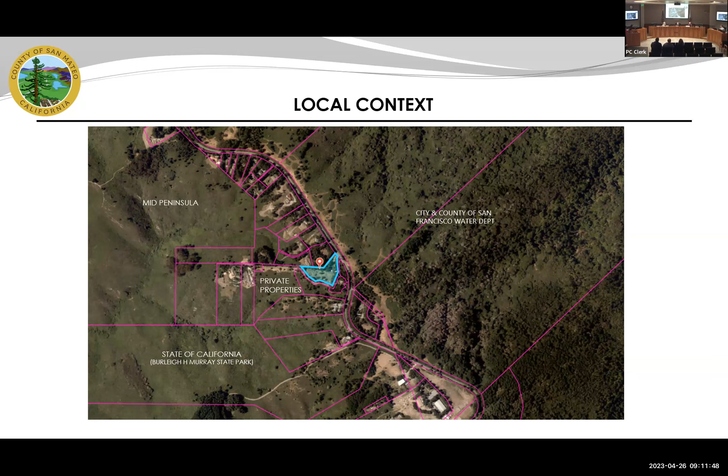The project is surrounded by a Midpeninsula parcel to the upper left corner and State of California Park on the bottom left, and San Francisco Water Department lands on the right-hand side of the parcel, with private properties adjacent to the subject parcel.

The house is accessed from a private road called Misty Ridge Road, which wraps around the existing house, and it is covered by a lot of trees in the front, as shown in that picture. The existing house has a 3-car attached garage, which will be retained and used as primary parking for the proposed new house. This slide shows the location of the existing house with respect to the proposed house and some views of the site.

The project also qualifies for an architectural exemption, as confirmed by staff through a site visit, as the proposed new house will not be visible from Skyline Boulevard.

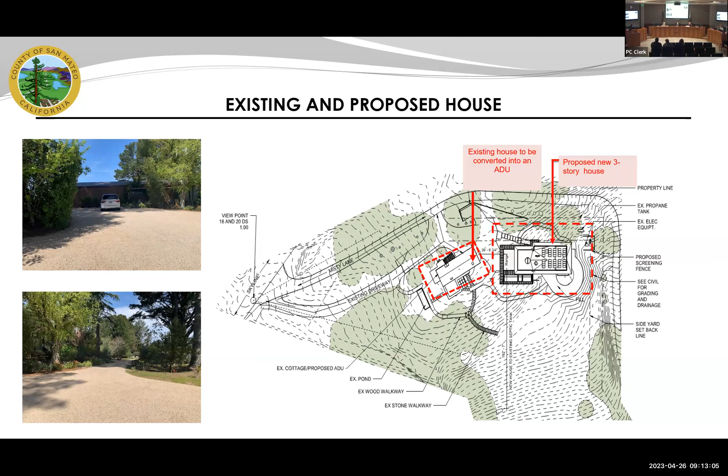Here's another slide of the existing and proposed house, which shows the existing gravel driveway, which will be maintained and widened for required fire truck turnaround access. The existing attached 3-car garage will be maintained and utilized for the proposed new house. Here's a rendering which shows the context of the proposed house with the current situation.

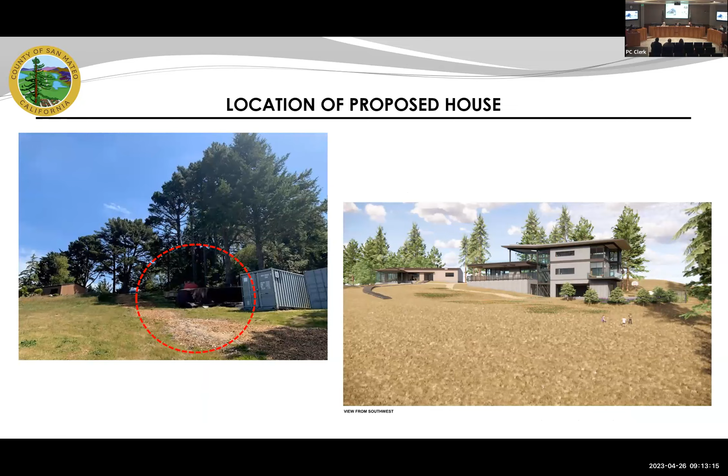So 2 Monterey pine trees, tree number 34 and 36, were removed under the hazardous tree exemption. These trees did not require a permit from the planning department, as they were exempt from permit requirements. None of the other significant trees are being removed for constructing this house.

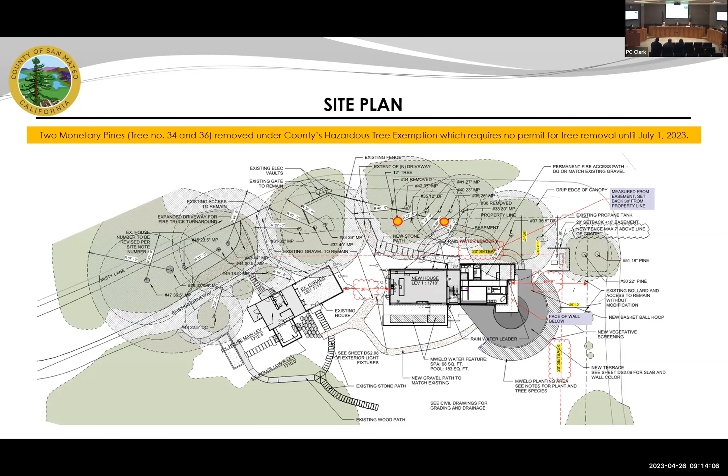Staff has also worked with the applicant to reduce the grading quantities. There was a second driveway being proposed from Misty Ridge Road, from the right-hand side, but that was eliminated and the existing driveway is being used. The picture showing a round corner is actually the proposed playground area for the house.

As mentioned before, the existing driveway, shown as the dotted line, will be widened up to 20 feet to meet the required fire truck turn radius. The project was conditionally approved by County Fire. The second driveway, shown as an arrow on the right-hand corner, was eliminated. The circular portion is just the play area, which will have a basketball hoop and other play equipment. The dotted lines show the limit of grading.

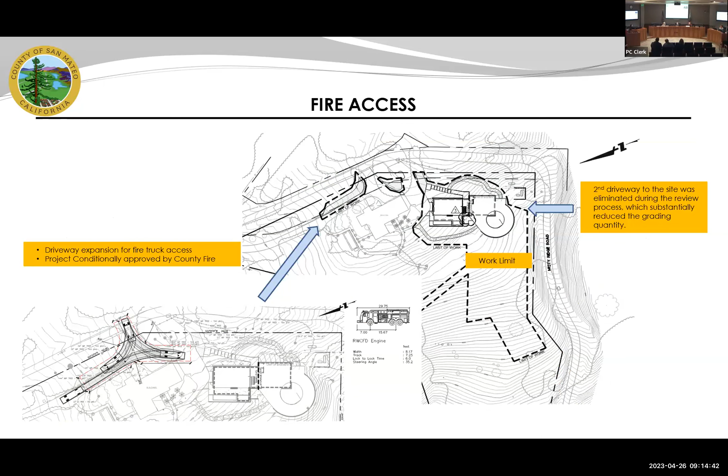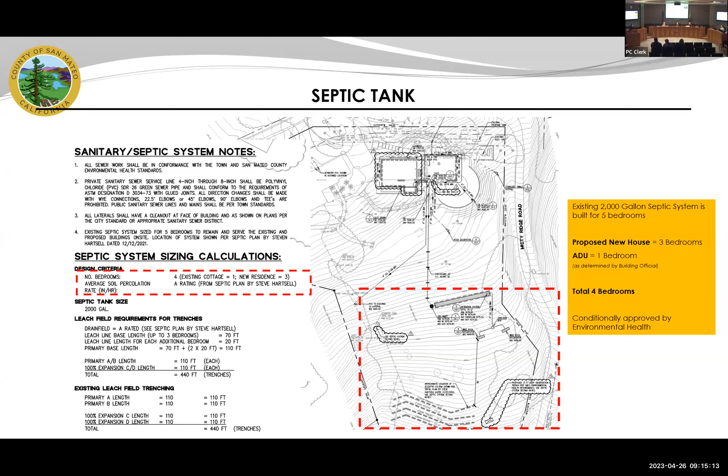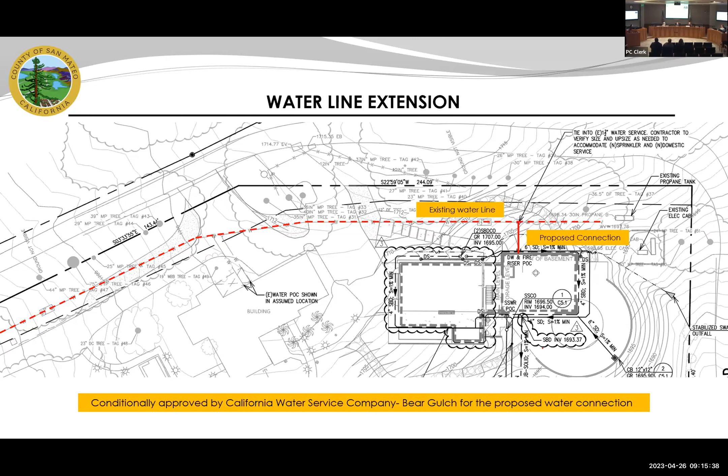This slide shows the water line connection that runs along Misty Ridge Road. The proposed house will tap into this existing water line connection. The site is served by California Water Service Company, Bear Gulch, and the applicant will be required to obtain all necessary permits from the water service company before the issuance of the building permit.

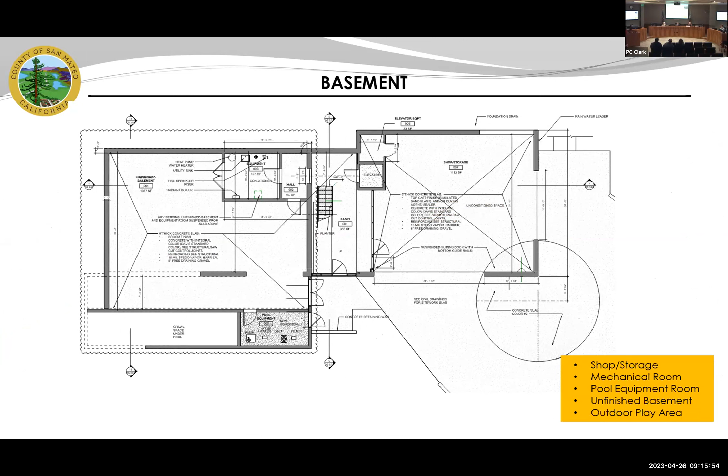This is the floor plan of the basement, which basically shows an unfinished basement, a mechanical unit, a storage room, and an outdoor play area.

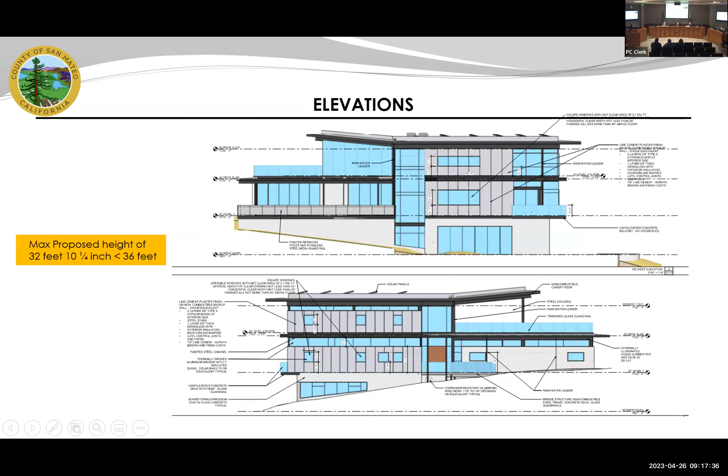Here are more elevations of the house. I'd like to highlight that the upper elevation is the one that will be visible from the Pacific Ocean, and the bottom one is the one that will face towards Skyline Boulevard or Misty Ridge Road. These are the side elevations as seen from Misty Ridge Road and from the existing house.

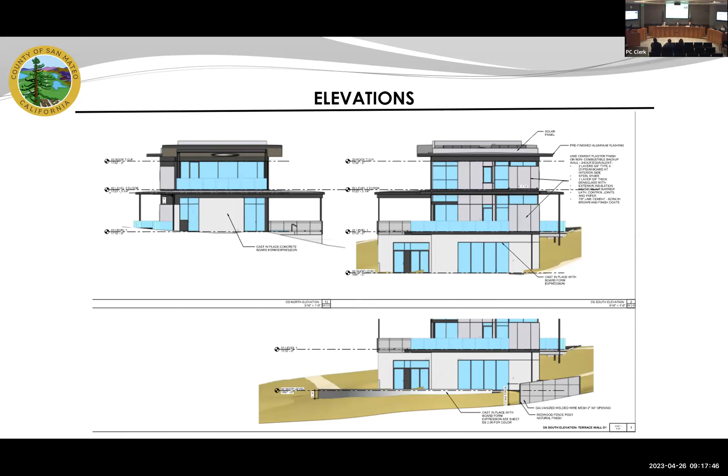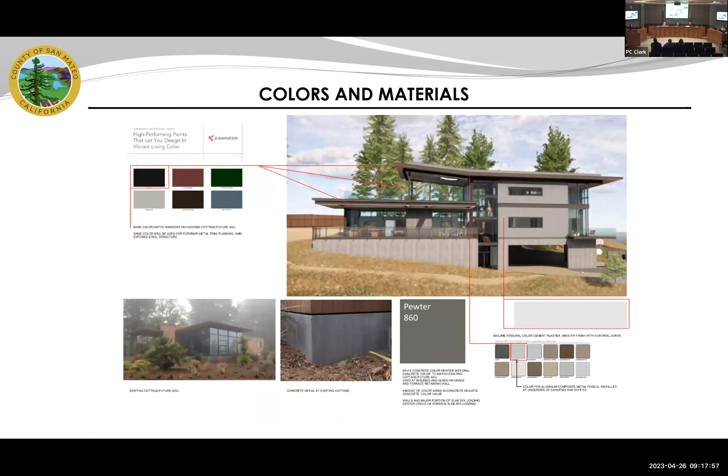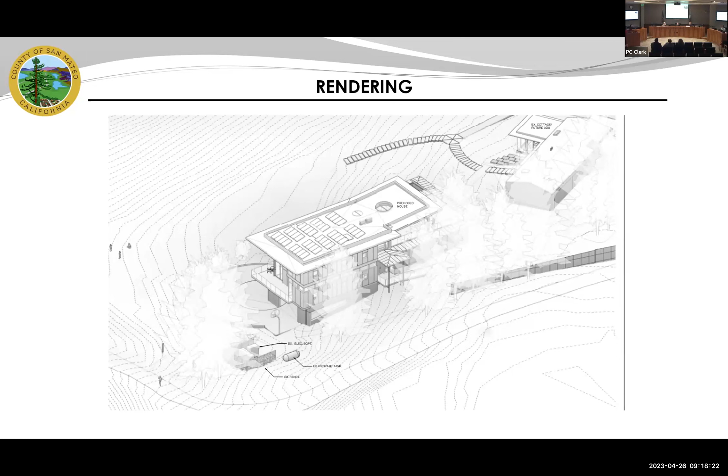This is the view from Skyline Boulevard, but it will be shielded by the existing trees on the side.

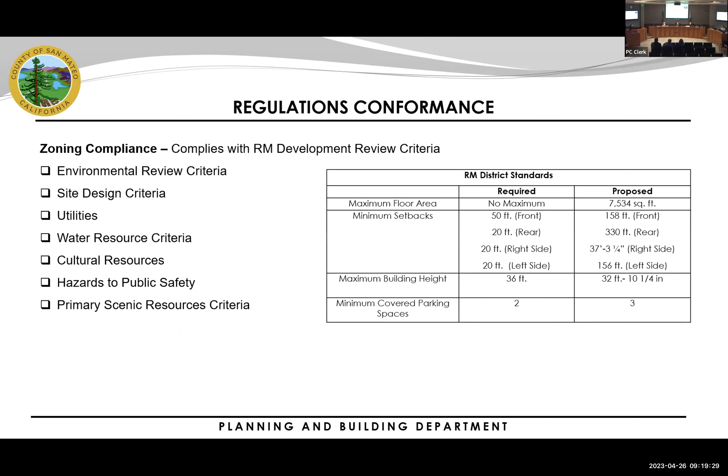The grading of the permit would not have a substantial adverse effect on the environment. The project conforms with the criteria of Chapter 8, Division 7 of the San Mateo County Ordinance Code, including the standards referenced in sections 9296. The project is consistent with the general plan.

An initial study and mitigated negative declaration was prepared for the project, and the comment period was from March 1st to March 23rd. No comments were received. Mitigation measures have been included as conditions of approval in attachment A. A total of 9 mitigation measures were included in the staff report to mitigate any potential impacts to aesthetics, cultural resources, geology and soil, and tribal cultural resources. Other best practice mitigation measures were included for air quality, biological resource, and climate change.

Staff recommends that the Planning Commission adopt the mitigated negative declaration and approve the resource management and grading permit for county file number PLN 2022-00109 by making the required findings and adopting the conditions of approval in attachment A of the staff report.

And I would also like to highlight that we received a comment late yesterday from Green Foothills regarding the use of the glass and its potential impact to birds. And there are a few ways which can be looked into to reduce any potential impacts, like glazing the glass or providing a screening. And the applicant is here to answer any follow-up questions you may have for that. That concludes my presentation, and I will be happy to take any further questions.

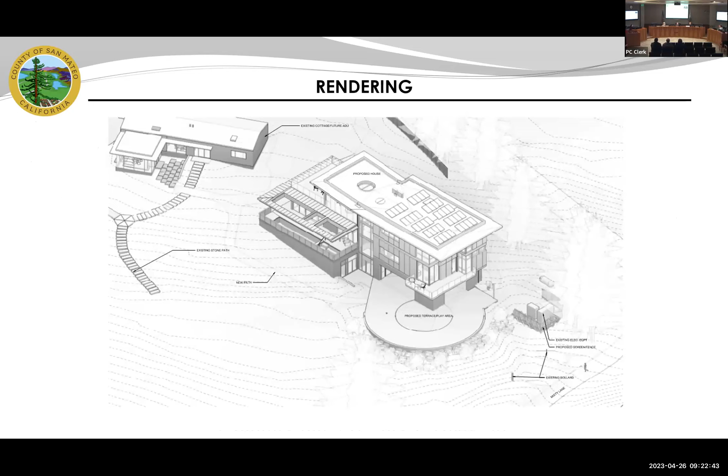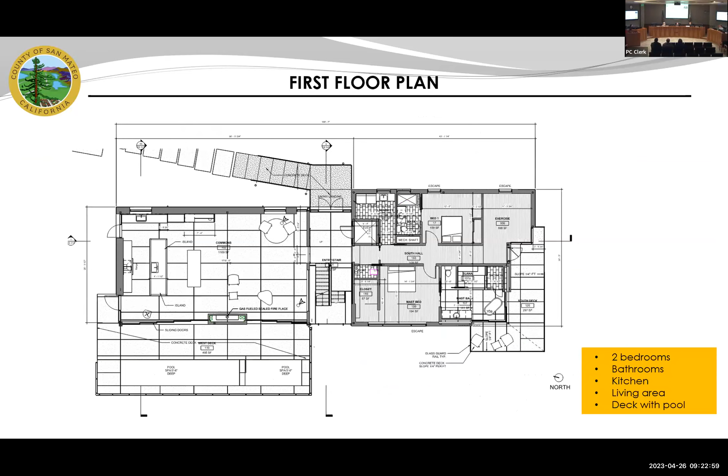So this open space next to the common living area on the bottom left-hand corner, which shows these two rectangular spaces, is actually pool. Oh, I see. Okay. And then it is going to be partially covered on the second floor, but still open to sky. And then the pool equipment will be located in the basement. So this is kind of attached to the house? Yes, it is attached to the house. Okay, all right. Let me see if I have anything else.

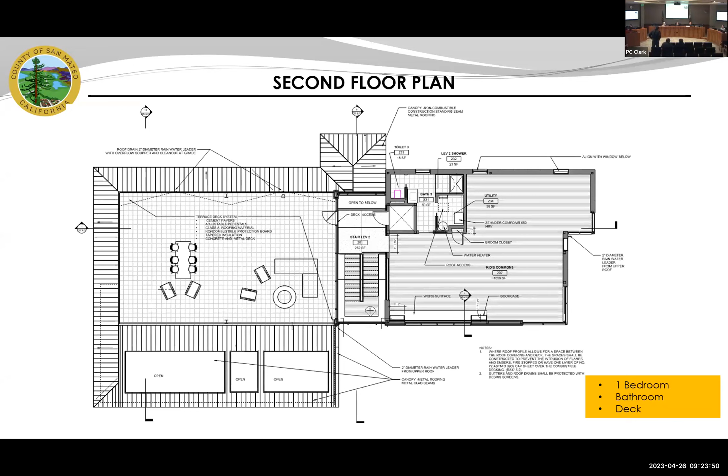Okay. Thank you. Yeah, I had something. I would like to know more about the glass too. So thank you, Sona. So if we have the applicant here, would applicant like to speak? You have 15 minutes. Please state your name and come to the podium.

Hi, everyone. My name is Omi Zahedi. This is my wife, Susan Perovi. And I'm James Gwise, the architect for the project. Okay, so a little bit about this project. We purchased this property about 3 years ago. We really fell in love with the area due to the views and the nature that it extends to us. This home that exists right now is very small. One of our little ones is somewhere in the back doing some homework, but we have 3 active boys. And so we need more space.

And so the idea behind purchasing this property was to complete the original plans of building a second home on here. James was the architect of the original home, and we've hired him to continue that vision forward with us being the new owners. The house itself lends itself to things that we have really looked at carefully over the last 2 years that we've been developing this to come and be here in front of you now.

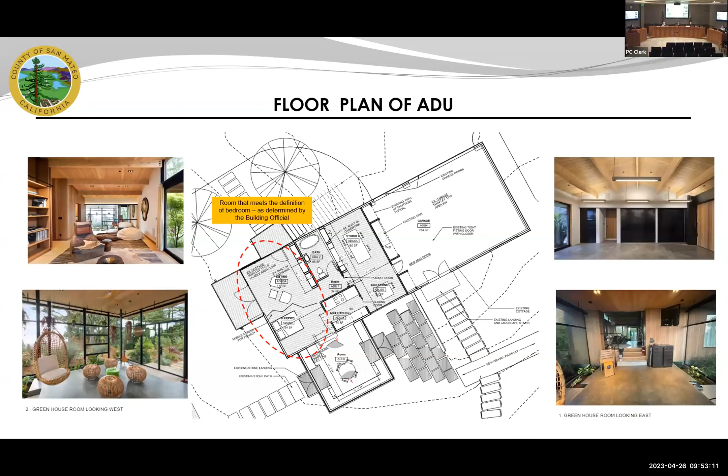Good morning, commissioners. The project before you today is a request from the San Mateo County Parks Department for a coastal development permit to implement a wildfire fuel reduction program. A component of that program includes the construction of a new fire access road in the south corner of Quarry Park. Additionally, the applicant is requesting approval to construct a bathroom facility in the meadow area of the park adjacent to the recently constructed pump track.

Start by familiarizing everybody with where we're at. Quarry Park property is located in the northeast side of El Granada on the rural side of the urban-rural boundary. It's composed of the original rock quarry area as well as the Wicklow addition and the Mirada Surf east and west portions.

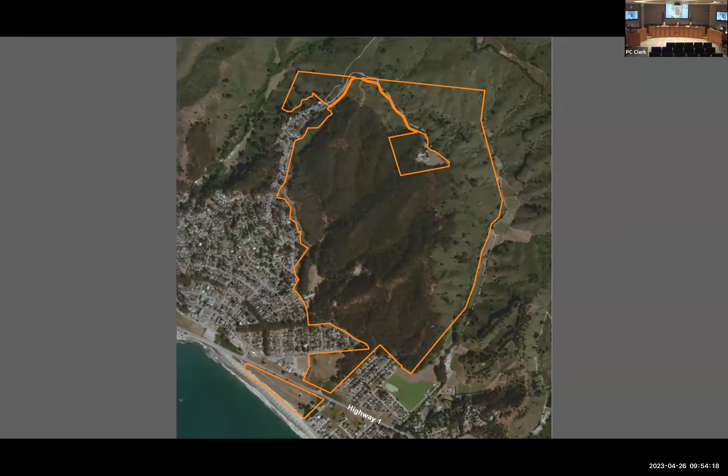Parks Department currently conducts limited fuel reduction activities within Quarry Park through the implementation of the county's routine maintenance program, which was approved by the Planning Commission in 2020. Typical fuel management activities covered by the RMP include creating or maintaining 100-foot wide shaded fuel breaks along the park's boundaries and along the park's fire roads and trails. Shaded fuel breaks are created through selective tree thinning and removal of undergrowth within the buffer zone.

With this requested CDP, the Parks Department is proposing to expand their fuel reduction activities into areas of the park beyond the currently managed service road corridors. Fuel removal along the park's boundaries closest to the residential neighborhoods is the first priority.

In this map here, the area identified as project number 5, which is highlighted in purple there, Parks proposes to establish a 200-foot wide non-shaded fuel break, similar to that which was created in the early 2000s along the park's boundary with Upper El Granada Boulevard. Within this non-shaded fuel break, all vegetation is removed during initial implementation and is then allowed to naturally regenerate.

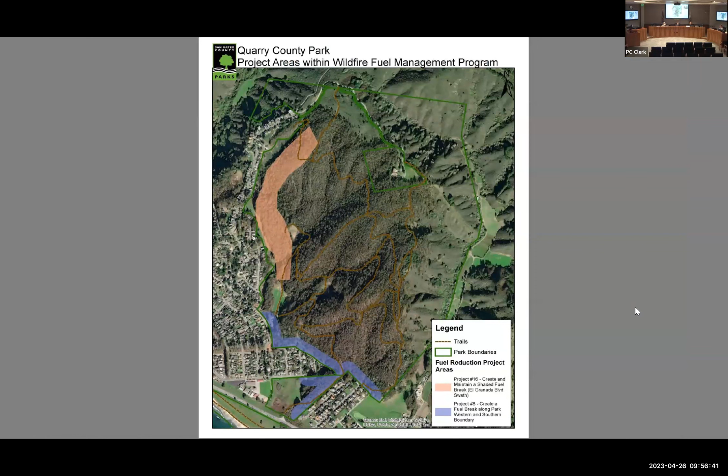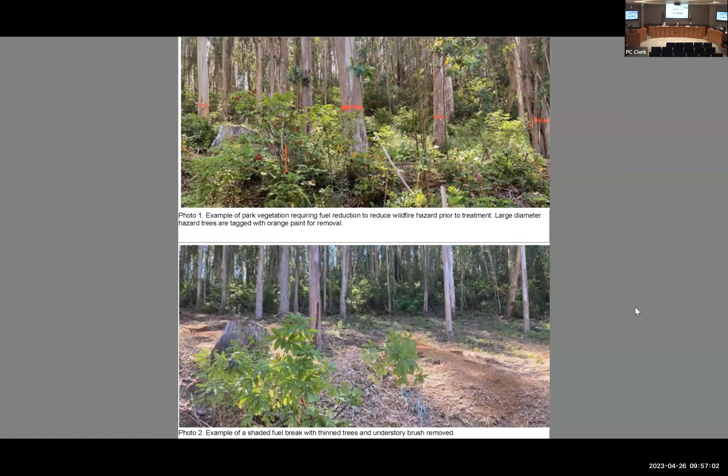Back to the map here. The area identified as project number 16, which is in that light brownish colored area. The goal is to establish a shaded fuel break for those areas to the east of the existing El Granada Boulevard fuel break. As can be seen in these example photos, the creation of shaded fuel breaks involves the removal of smaller understory trees, the limbing up of larger retained trees, the removal of brush and other hanging debris that can serve as a ladder for fire to move into the upper tree canopy, and in some instances, the removal of dead or dying hazard trees. It's another example of before and after treatment areas.

So in addition to these two project areas that I just discussed, parks will continue to maintain existing shaded fuel breaks along interior access roads within the park in accordance with the existing routine maintenance program. And those are the areas that are highlighted in green and purple there.

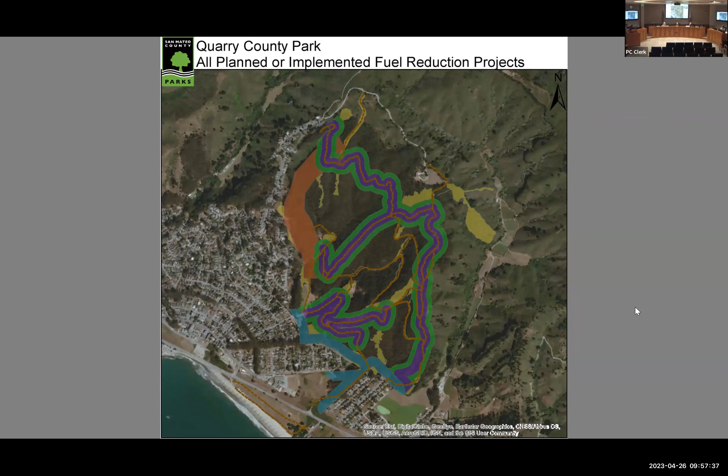Beyond these areas, Parks Department is requesting with this application to implement a long-term fuel reduction program throughout the park, which is shown here in these shaded blue areas. The areas of priority are shown here on slide 12 with the darkest shades of blue as the highest priority. In these areas, the overall canopy will be thinned out in a similar fashion as the shaded fuel breaks. It is not the intent of Parks Department to remove all trees from these areas.

Now, given the large size of these areas and their topography, combined with staffing resources, it will take several years for these additional areas to be treated. In light of the longer-term nature of working these additional areas, the Parks Department will develop a specific work plan for each area as they progress through the park.

Planning staff would like to amend condition of approval number 9, which is titled Fuel Management Plan, in your staff report to include a requirement that these work area plans be submitted to the Planning Department for review with the conditions of this permit as well as the conditions of the routine maintenance program. And that is discussed in the memo I distributed to the commissioners this morning before the start of the meeting.

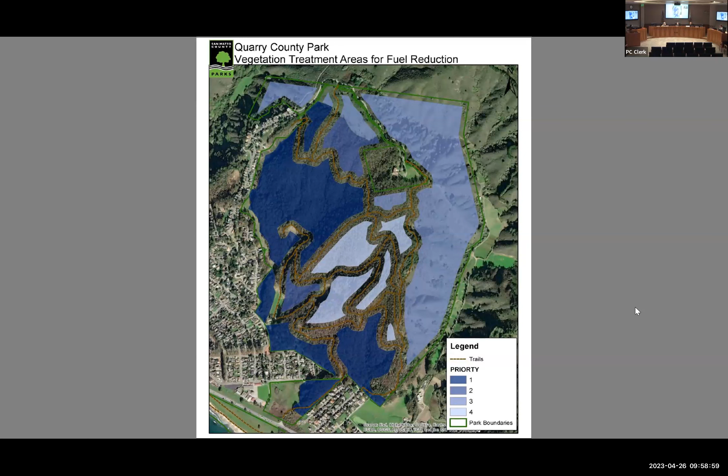Now, in addition to the vegetation management aspect of the overall plan, the Parks Department is also proposing to construct a new 2,200-foot long fire road to provide access to the southern corner of Quarry Park. And this would allow CDF fire crews to get to that portion of the park. At the present time, there is no vehicular access down to that area. The road will extend from the end of Coronado Avenue and connect to the existing South Ridge Trail. A gate will be installed at the Coronado Road entrance to control vehicle access.

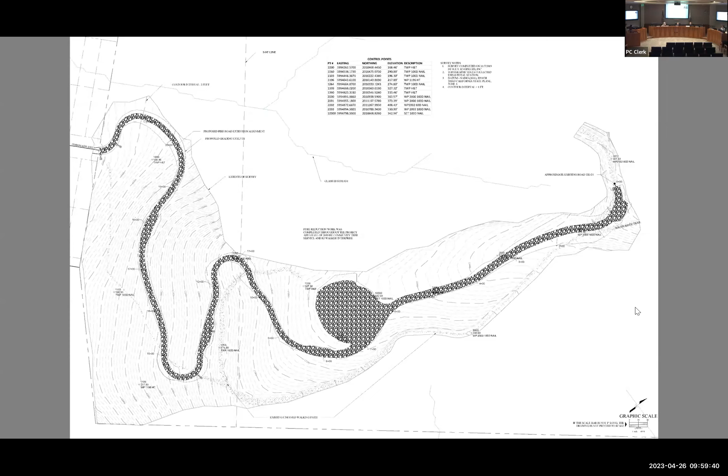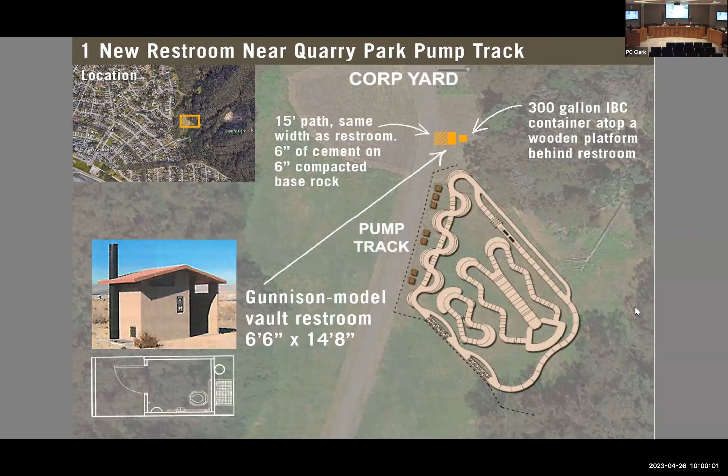As discussed in your staff report, there are sensitive habitat areas within Quarry Park property, as well as the potential for several special status plant and animal species to occur within the park. These include California red-legged frog and San Francisco garter snake. Potential impacts to these species were previously analyzed at the time the routine maintenance program was developed and mitigation measures were placed on that permit. Those mitigation measures continue to be in effect and apply to this request for additional vegetation management activities within the park.

However, in preparing the CEQA document for this permit, the county's consultant identified additional plant and animal species that require protection. Specifically, the potential for impacts to California strawberry were identified and appropriate mitigation measures were developed by the consultant to ensure compliance with policy 7.49 of the county's LCP. Additional measures proposed by the consultant to reduce impacts to burrowing owls, special status bumblebees, and roosting bats have been included as conditions of approval in your staff report. And with their inclusion, staff believes the project complies with the policies of Chapter 7 of the LCP.

The other major policy discussion in your staff report relates to the project's consistency with the visual resources chapter of the LCP, specifically policies 8.5 and 8.9. The goal of this project is not to remove all trees and vegetation from the treatment areas, but to thin out the eucalyptus grove within the treatment areas in order to reduce risks of fire. Most of the trees that will be removed as part of this management program will be eucalyptus trees, which are noted for their high combustibility and the inordinate amount of debris that they drop and accumulates throughout the grove.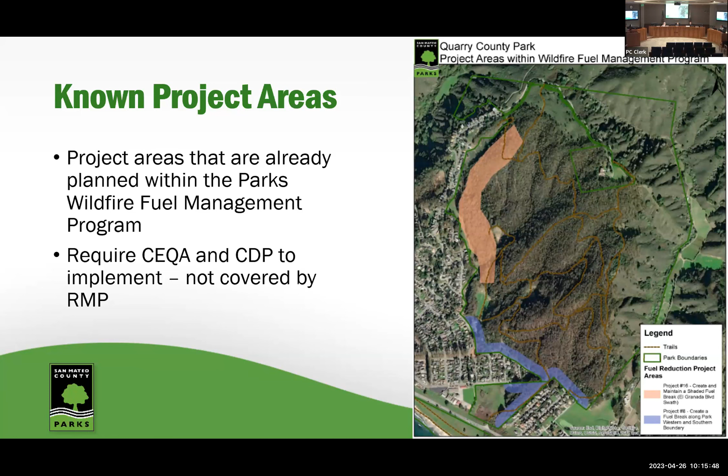And so these are included as specific projects that we have planned, but then through subsequent years and as funding is available, this measure would allow us to further define additional projects in the future and, as Mike mentioned, as suggested in the amendment to that condition, submit that to the planning department just to confirm consistency.

And within these areas, consistent with the mitigation measures we identify, we would be able to design the projects in a way that we can avoid ESHAs and sensitive resources. We would have appropriate biological monitoring occur prior to and throughout project implementation, to ensure the work is designed to avoid these resources, and that anything discovered during the course of work can be effectively avoided. That's been our standard practice for the work we've done throughout the park to date.

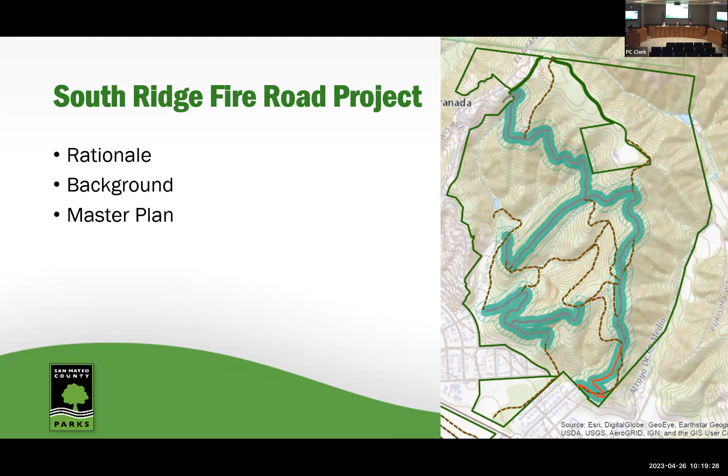This has been planned and coordinated with CAL FIRE and other fire departments in the county, alongside whom we identified the need for this and the benefit it would provide for emergency access. The design has been intentional to align with CAL FIRE standards for fire roads in terms of grade, width, spacing and location of turnouts, and essentially the needs they have for fire road access within parkland settings.

This is another image of the overall plan or design for the fire road. It'll be a 12-foot width along the majority of the length, but where turnouts are present, the width could be between 20 to 30 feet. There are 5 turnouts included in the design, as well as one larger turnaround area. The total length is 2,240 feet, and the grade ranges between 5 to 16%. There'll also be a 14-foot gate added to the end of the trail where the road meets Coronado.

The surface of the road would be a rocked aggregate with a depth of at least 6 inches, and this would generally meet the Caltrans 1.5 inch class 2 aggregate base gradation specifications, with specifications for particle size and fine contents as well.

One comment we received from the Mid-Coast Community Council was regarding the rocking of the service roads, requesting the potential to include an earth-toned rocking material, or a soil amendment added to the road surfacing to create a more natural coloring. This is something we'll need to include with the contractor bid specifications, which will come at a later time. We anticipate needing to include this as an optional bid item, because it would depend on overall cost and availability of material meeting that earth-toned base rock specification, and our overall project budget to select that material over a more standard base rock. I'm not familiar with the cost differences associated with that, so that's something we'd look to our contractors for the project to spec out and provide a cost comparison for. We'll be discussing with our Department of Public Works to include that as an optional line item, and be able to have that cost comparison for the difference.

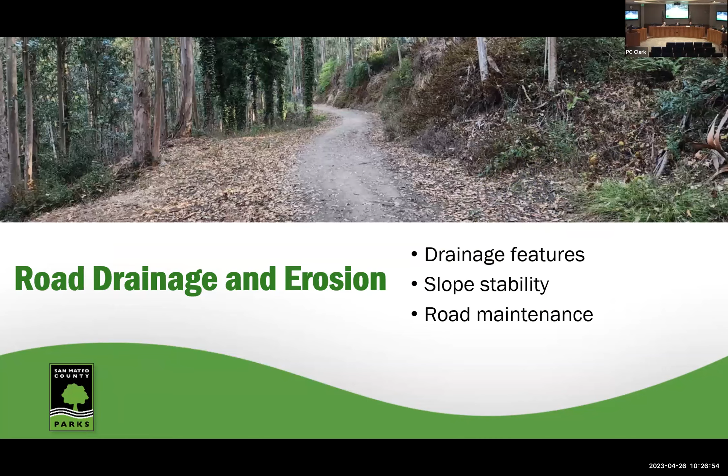I'm happy to answer any more questions and provide any more information. Thank you, Hannah. Question? Hi, so we've talked about this before. I just wanted to talk about this.

This is about the trail surface, the desire for a natural look and feel, since this will also be used as a trail. The Mid-Coast Council has for a long time advocated for this type of trail surface, ideally packed dirt. But then when we got to Pillar Point, when the access road there was extended, obviously this was going to be for all-weather vehicles. The request was, could you put in your specifications to blend into the last 3-inch lift of crushed rock native soil, to soften the color and texture of this trail tread?

Obviously when the access road was constructed in 2018, clearly an effort had been made to mix the native soil in and do this, but the implementation was very uneven. After that, the hope was that Parks would work to refine the effort going forward, such as at Quarry Park, to refine the techniques and hopefully come up with a road that will serve fire and emergency access and also provide a more natural appearance and feel to trail users.

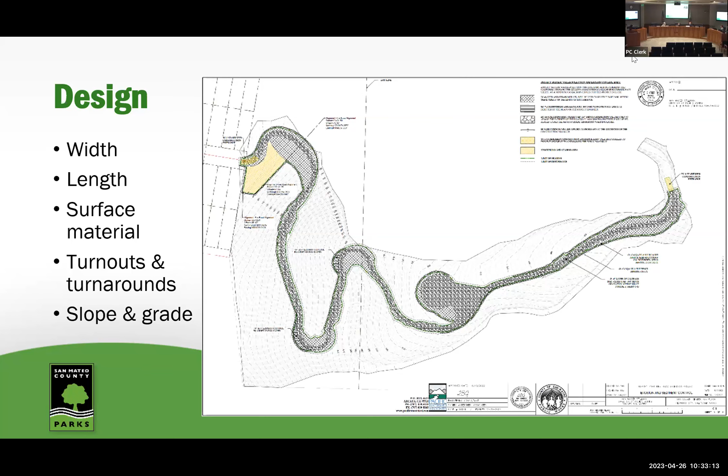You already addressed the Mid-Coast Community Council's suggestions. Okay, so no, I don't have any other questions. Thank you very much, Anna.

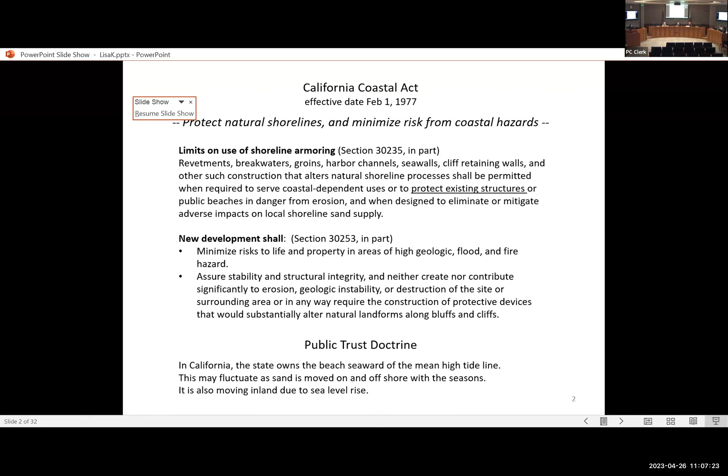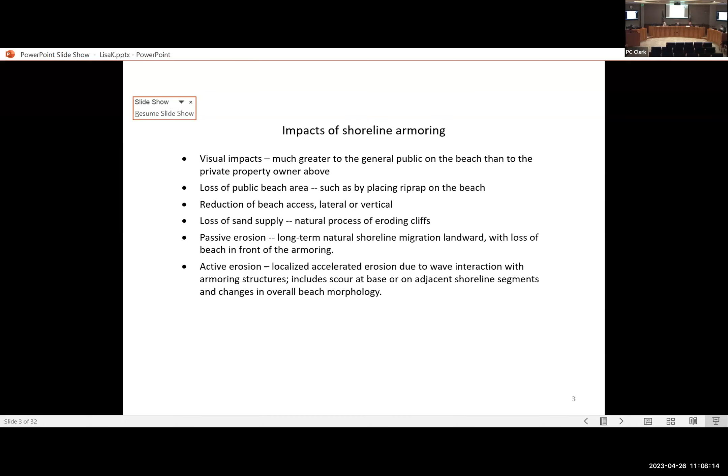The impacts of shoreline armoring are visual impacts, which are much greater to the general public on the beach than to the private property owner above; loss of public beach area, such as by placing riprap on the beach; reduction of beach access, lateral or vertical—lateral is along the shore, vertical is to and from the beach; loss of sand supply from the natural process of eroding cliffs; passive erosion, which is long-term natural shoreline migration landward with loss of beach in front of the armoring; and active erosion, localized accelerated erosion due to wave interaction with armoring structures, including scour at the base or on adjacent shoreline segments, and changes in overall beach morphology.

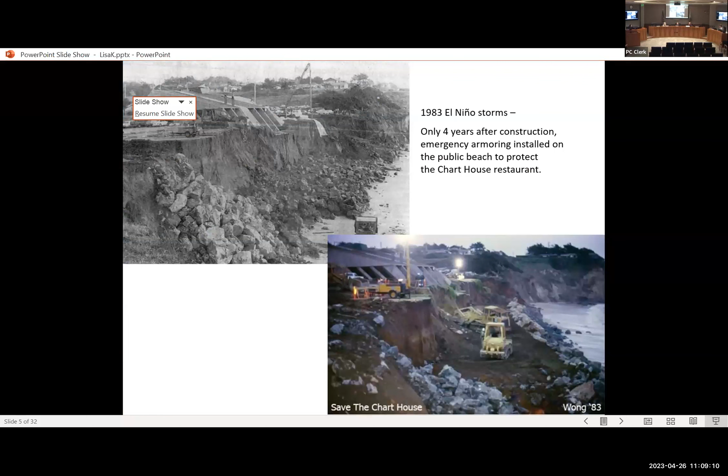1983 El Nino storms. Only 4 years after construction, emergency armoring installed on the public beach to protect the Chart House restaurant. Next. Early permitting was at the Coastal Commission for the restaurant and at the county for the riprap. The upper image shows 1979, the newly constructed Chart House restaurant built on the footprint of the former 50s motel restaurant. It's right at the edge of the bluff. The county approved the riprap after the fact in 1984 for 460 linear feet of ocean bluff, and reconstruct and install storm drainage in the parking lots at 8150 Cabrillo Highway. Next.

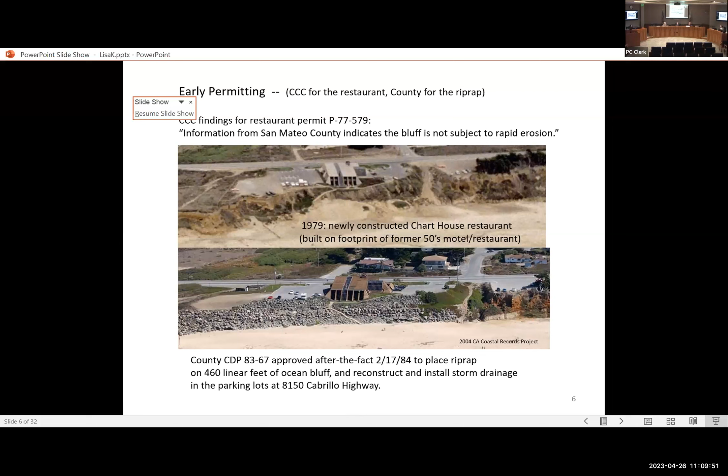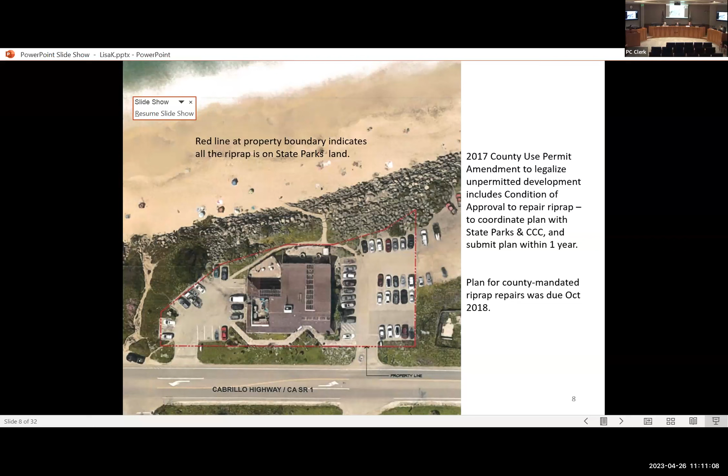Next. The red line at the property boundary indicates all the riprap is on state parks land. In 2017, county use permit amendment to legalize unpermitted development includes a condition of approval to repair the riprap, to coordinate the plan with state parks and Coastal Commission, and submit the plan within 1 year. Plan for the county mandated riprap repairs was due October 2018. Next.

Riprap repairs should include removal of view-blocking boulders on the bluff top. This comes from the Mid-Coast Council in 2017. The riprap extends onto the top of the bluff, far beyond where needed for erosion protection, blocking public access and views. Planned cross sections of the riprap are conceptual, showing an even gentle slope, but in reality, the slope is much steeper along the bottom and more level along the top. The red line marks the upper reach of the riprap in front of the restaurant, which has no view obstruction. Next.

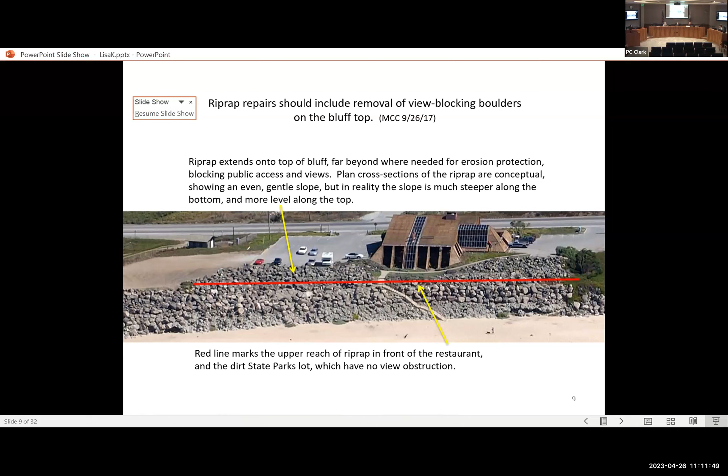Just to the south, now this is Fitzgerald Marine Reserve, Dean Creek to San Vicente Creek. Prior to 1983, public beach access existed both north and south of the FMR access ramp. FMR, that's Fitzgerald Marine Reserve. And these pre-coastal act houses on the bluff top there, the county's 1980s armoring permit approvals noted the wide beach and that lateral access would not be blocked by riprap placed on the public beach to protect 3 homes. The lower picture shows how that looks.

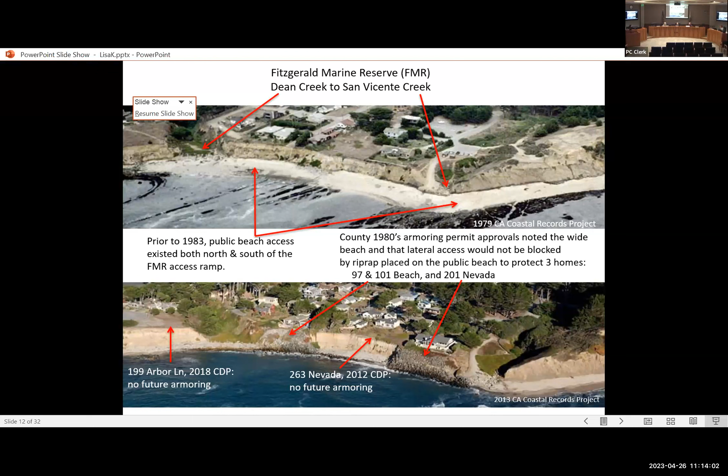And also I point out here, you may be familiar with the one on the left, 199 Arbor Lane, where we approved a condition of approval, no future armoring for development there, hasn't been built yet. And then there was also that no future armoring at the other arrow. So you have a mix here of allowed armoring and where the coastline is. Okay, next. So here's an example of managed retreat.

When it was threatened by bluff erosion in 2002, instead of armoring the cliff, the historic house at 100 Beach Street was moved inland onto the neighboring parcel. In 2012, on appeal of a CDP for an expansion of the relocated house, the Coastal Commission prohibited future armoring. Next slide.

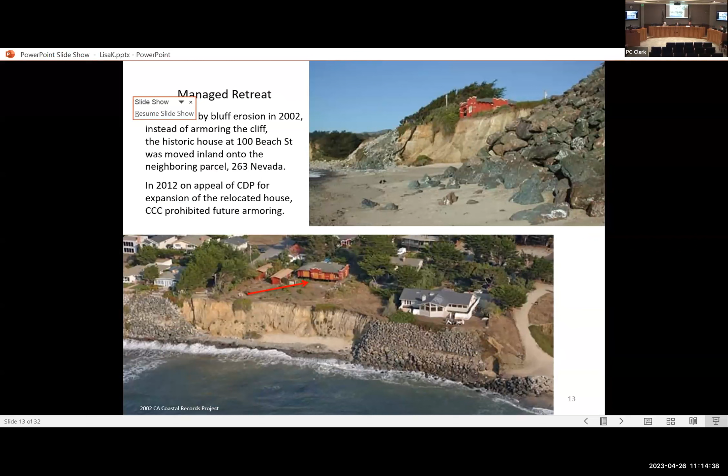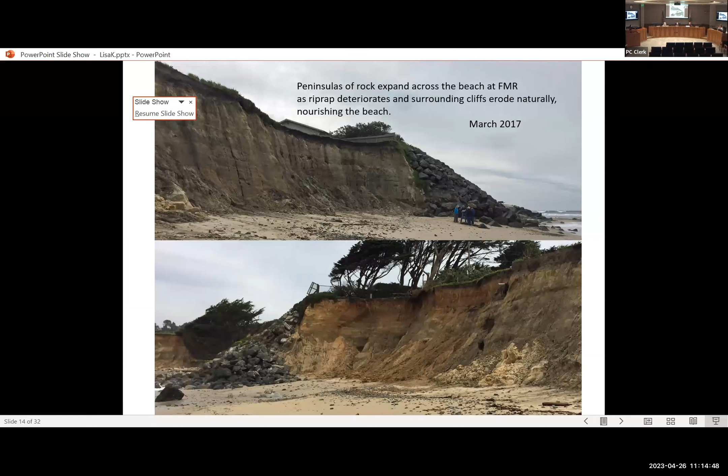Peninsulas of rock expand across the beach at the Marine Reserve as riprap deteriorates and surrounding cliffs erode inland naturally, nourishing the beach. Next. The thing is in the way, I can't read the slide. Local geologists submitted this to the county in 2013 of his analysis of the deteriorating riprap and the hazards this causes. Falling rocks on the beach. And anyway, next slide.

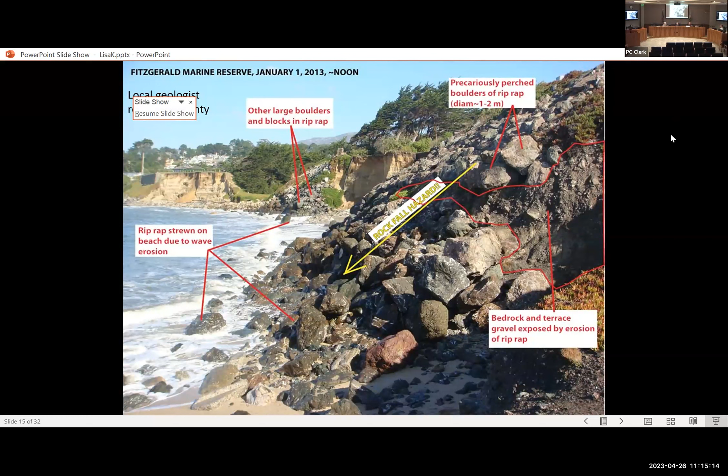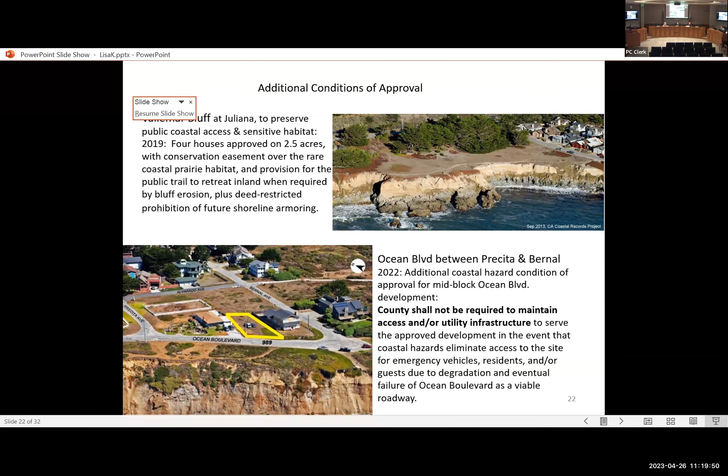Next slide. Then there were some additional conditions added, like at the Vallemar Bluff, conditions were added to preserve public coastal access with the moving easement and sensitive habitat. Of course, that was agreed to by the applicant as the process was going through permitting. And then also at the bottom, you're familiar with this Ocean Boulevard property where we approved a CDP between Precita and Bernal, where they only have access through Ocean Boulevard. And so precedent was, I assume, established here. The county added conditions that they are not required to maintain access on the road or utility infrastructure to serve that development when the road fails. Next.

So Princeton shoreline, I'm going to be very brief because it's all wrapped up in the shoreline management plan. And there's a lot of things going on here we don't have time for today. But just the 1972 image here on top, you see the Romeo Pier and the warehouses that were built at that time. They sensibly built them well off the beach next to the road. And then you see in the lower image what it looks like today. Next slide.

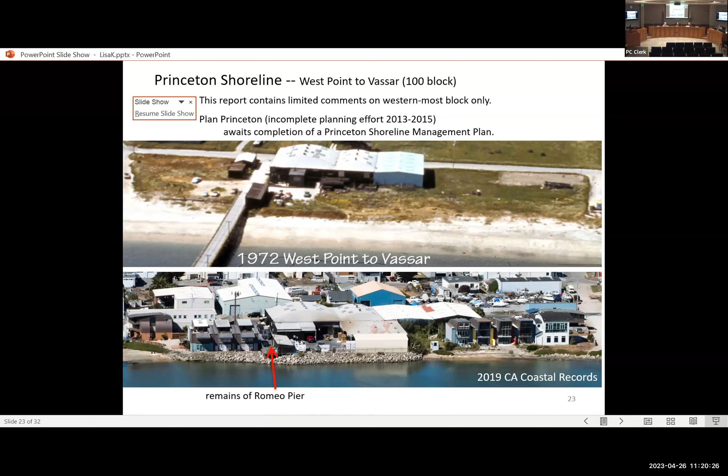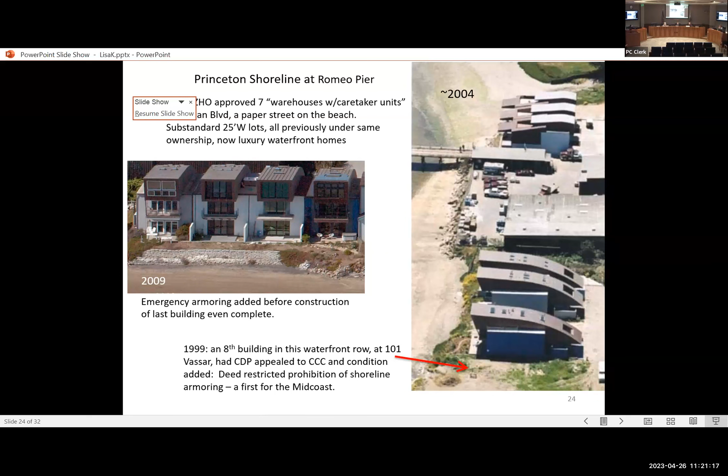So in 1997, the zoning hearing officer approved 7, quote, warehouses with caretaker units on Ocean Boulevard, which is a paper street on the beach, all substandard 25-foot wide lots that were all previously under the same ownership. And these buildings are now luxury waterfront homes. Emergency armoring was added before construction of the last building was even complete. In 1999, an 8th building in this waterfront row had its CDP appealed to the Coastal Commission with a condition added, deed restricted prohibition of shoreline armoring. This was a first for the mid-coast. Next slide.

Lateral beach access at the foot of Romeo Pier was blocked in 2009 by illegally placed riprap trucked down the street from 380 Princeton Avenue, a boulder stockpile stored there since the Coastal Commission riprap enforcement action in 2008. That 2008 enforcement action, to my knowledge, is the only armoring enforcement action that has occurred in the Mid-Coast. I could be wrong. I'm not aware of any other. And the rocks on the beach are still there. Next slide.

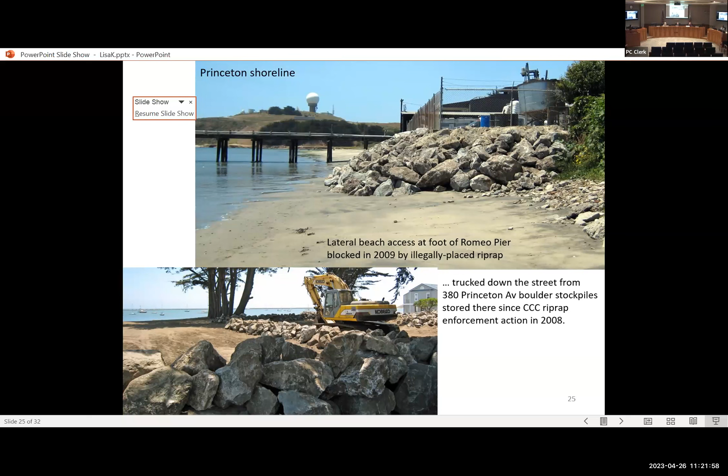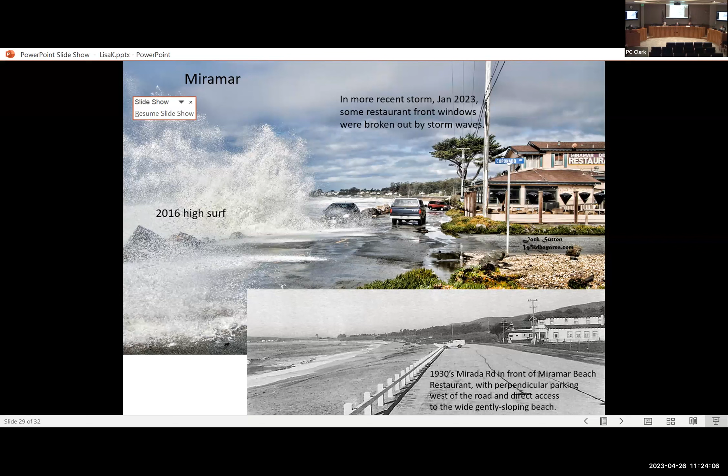Next slide. Miramar. The top image here is 2016 high surf. But in the more recent January storms, some restaurant front windows were broken out by storm waves. The building in the image at the bottom is the same building from the 1930s. It was there then, and you can see the width of the road. There was the road and perpendicular parking on the side, and then a gentle slope directly down to the surf. And compare that to the road above. It's so narrow you couldn't park there, and then just the pile of riprap and a drop off down to the water. Next slide.

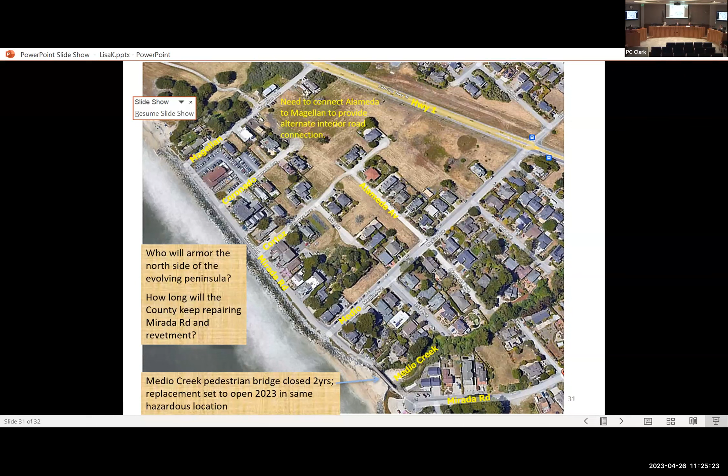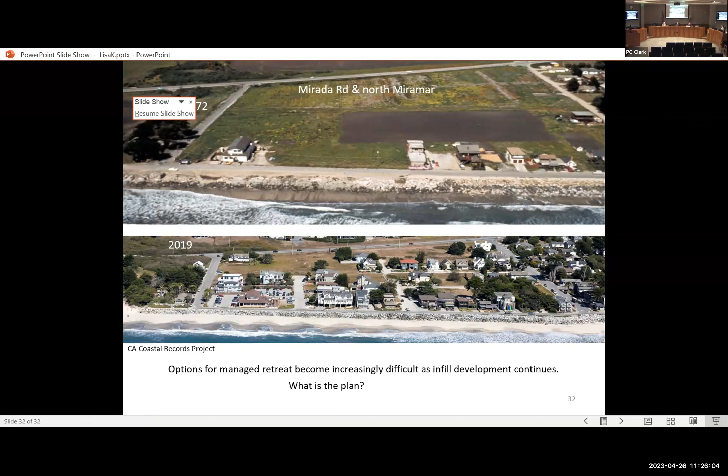This is the last slide. So the image at the top, 1972, of this neighborhood. And there's Mirada Road, and you can see they've already started armoring it. And there you have all the development that we have been approving there, and that is increasing all the time. And the options for managed retreat become increasingly difficult as infill development continues. So here again, what is the plan? And that's it. Any questions or discussion? I hope there is interest in this topic.

Yes, there absolutely is. I want to thank Commissioner Ketchum for bringing these matters to the Planning Commission's attention. I think they are very important, and they pose some very serious challenges and issues that I agree need to be addressed. Your presentation contained a lot of questions, and I'd be happy to try and address some of those that are of greatest interest to the commissioners. And let me start by trying to address what I think are some of the biggest questions raised by your presentation.

And I think one of the overarching questions is that we've got these really pressing, difficult, complex challenges to solve. Who's going to take care of it? Who's going to take the lead, right? And I think it's important to recognize that we've got many players working together in some instances, and other players who need to come to the table to help address these challenges. When you're dealing with the immediate shoreline environment, those players include the State Coastal Commission and the State Lands Commission, who are essentially the landlords.